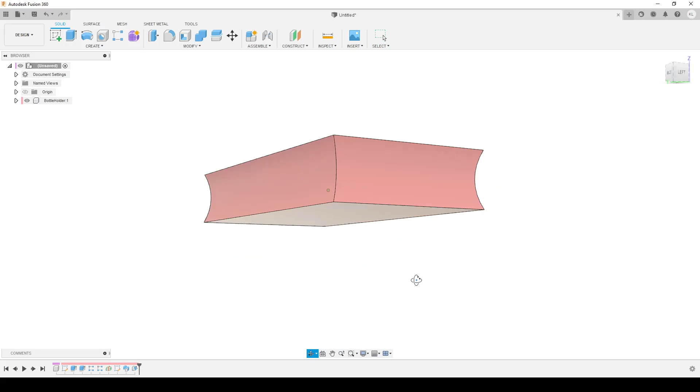I'm going to talk about how I designed it. This is a holder for pipette bottles for pigments for Jesmonite, because they come in really large bottles which are really hard to get the correct amount of pigment into the Jesmonite, which is a casting material.

So I needed a small holder like this. I have some design intents: an outer limit of a box and an oversize of the bottles. That's basically it, and I wanted like 7 bottles. I needed some way to get a grip of the box, so I did this little indent here.

I'm going to have a look at this because I see a lot of people get stuck in their design intent. They start designing without having some basic parameters - are you limited in size somehow and stuff like that - so you don't get too far into the design before you get into trouble. This is going to be quite basic for you who want to see my stupid advanced workflows. We can skip this one or just tag along and comment on how I do things wrong.

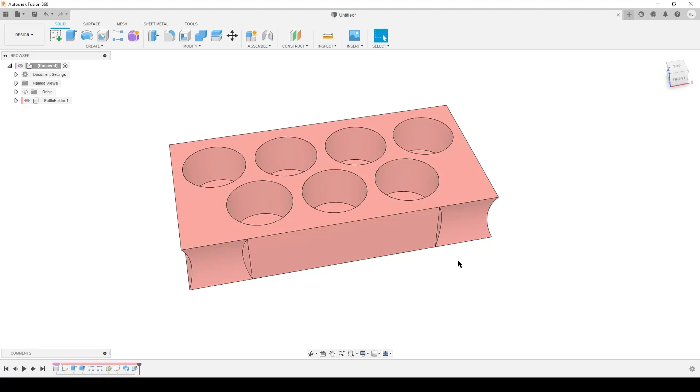So let's have a look at this. We're going to do new design. I will not save it, but you should always start by saving. Let's call it holder. So we start the component as always, and we're going to start with a sketch.

We can start it from the top. We're going to start with a rectangle, because one of the things I knew, an oversize that I'm limited to due to my 3D printer and some other space, so it needs to be 155 times 80. These I can't change that much because there are limitations in the physical world, so this is what I need.

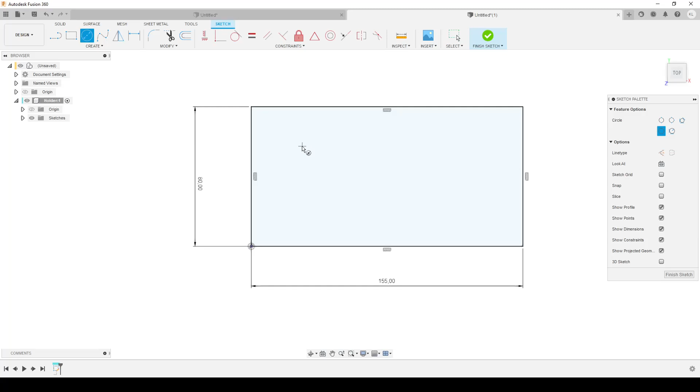The limitation I have, of course, is the bottle. The holes need to be 32.5, that's for the bottle, and enough space to get the bottle in and out. We're going to do 2 rows, so I'm going to do 2 circles. I'm going to tell Fusion that these circles want to be equal. So now I have my circles.

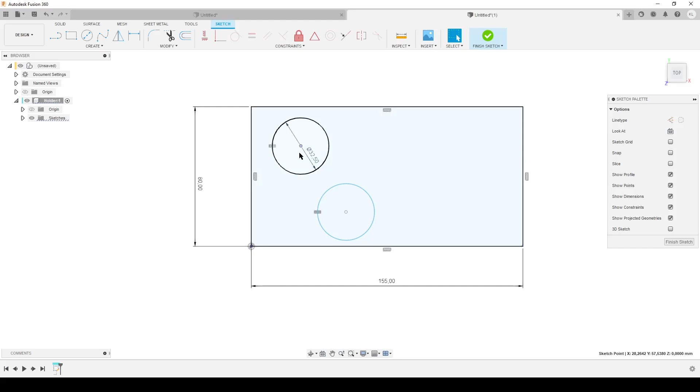I'm going to of course use rectangular patterns to spread this out later, but how do I want to place this? Let's have a look at the picture again. If we're going to put bottles in one even number and an odd number, we're going to make a triangle shape, or equilateral triangle shape, in the bottle.

So let's do that. Draw line and construction lines from here to here and up to our imaginary bottle, which is not there, and back to here. And of course we tell Fusion that all these 3 lines should be equal. Now we get to somewhere.

Oops, sorry, shouldn't move it like that. The thing I want to do now, we can pull it out like that. Yes, we can move it like that. I want to now start constraining these bottles inside this box here.

So top and down, I want the middle. This line here, even if it is slightly tilted, is a representation of a center between this. So let's do another line.

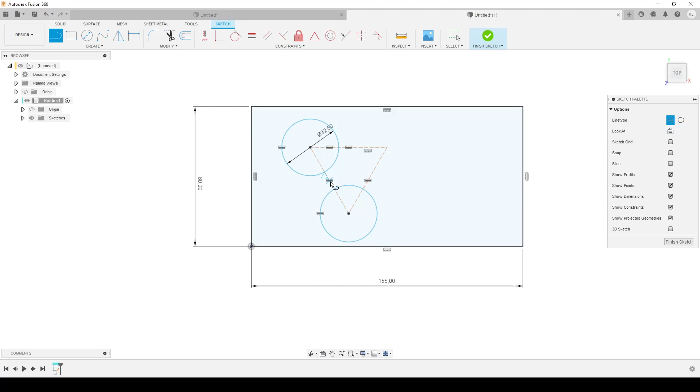You can of course just straightly do horizontal constraints, but sometimes I like to add lines so I know what I'm doing. Construction line from midpoint of this line to midpoint here. Tell Fusion I want these to be horizontal and vertical, like that. So now we've done it in one direction.

We can still move it up and down, but now we need to lock them in this direction so you get symmetric. And if you watch, let's look at my design intent: 4 bottles. If I have 4 bottles, I have 3 spaces between - 1, 2, 3.

So let's do that. Line. I'm going to do 1 line. I'm going to do 1 more. So this point out here is where the last bottle in this row should be.

And of course, these 3 lines here, marking up like this, should be equal. And they are an odd number of lines. That means that the center of this line should be centered to the top of the rectangle here.

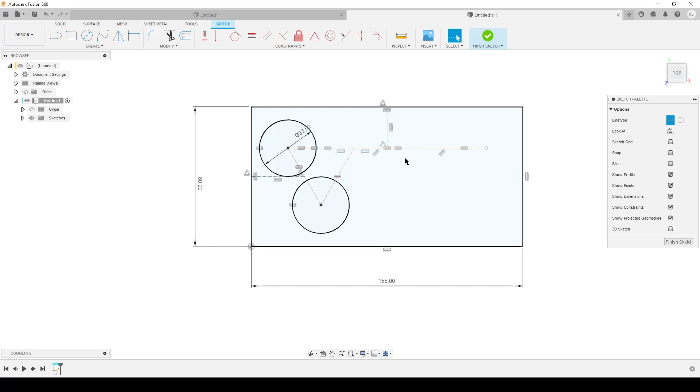So let's do that. There are other ways to do this, it's just giving me some options. So do like that. By doing this now, I have basically locked everything down except where I want the bottle. Of course, they cannot overlap.

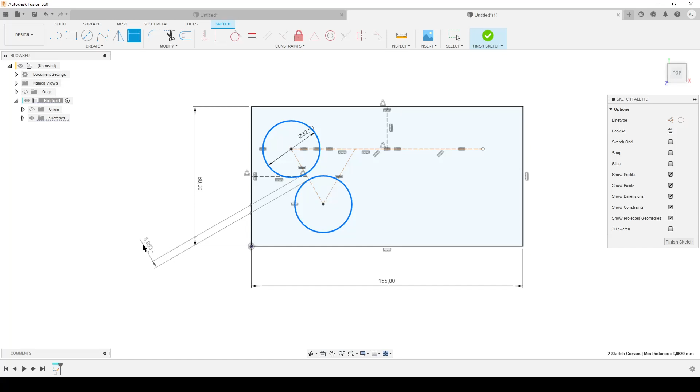So the thing that's of course in my design intent is that I want some spacing in between here, so let's add that. You hit D for dimension, right click and select Circle/Arc Tangent and select these 2. I want the spacing between the bottles to be 5 millimeters. By doing that, open up the sketches - we now have a fully defined sketch.

I have not defined the dimension to the side anywhere because they are locked into the middle rectangle with these 2 constrained lines. It's not the same distance everywhere, but I really don't care about that. So this gives me a very nicely locked down sketch.

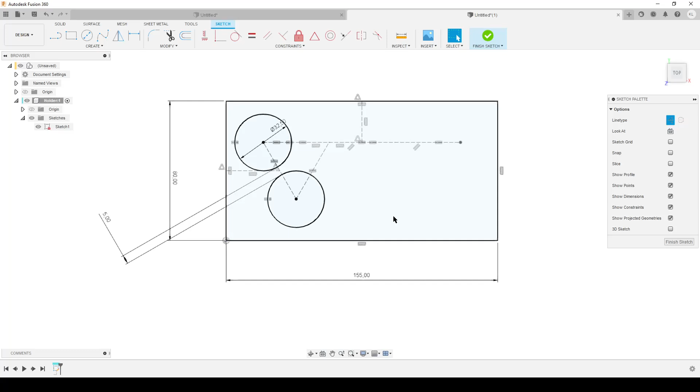I should say this is parametric workflow, but you can go back and change parameters. I will now use some measure, which means you have to redo the measure if you change dimensions. But my intention was these two dimensions are locked when the size of bottles are locked, and I also basically locked down this.

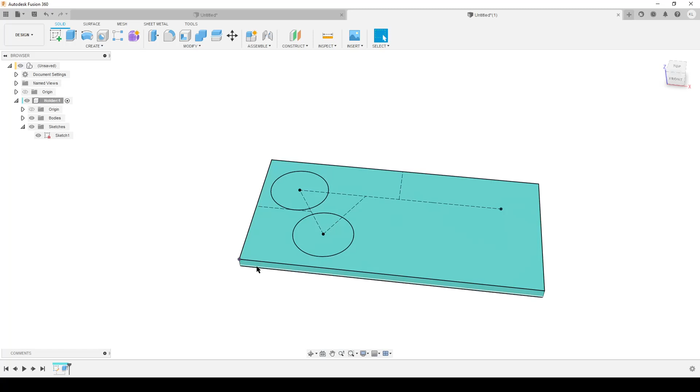So now I have something to start doing my 3D body. E for extrude. I'm going to extrude everything minus 5mm, a quite thick bottom. And I'm going to extrude this upwards 23mm. Now I have the basic shape I want.

Now I need to spread out these. S on the keyboard, rectangular pattern. We're going to use faces, this face. Now in direction, I can select any one of these short lines here. I can select the edge out here, but I can select this line instead. I'll explain shortly why. Check that the distance type is spacing.

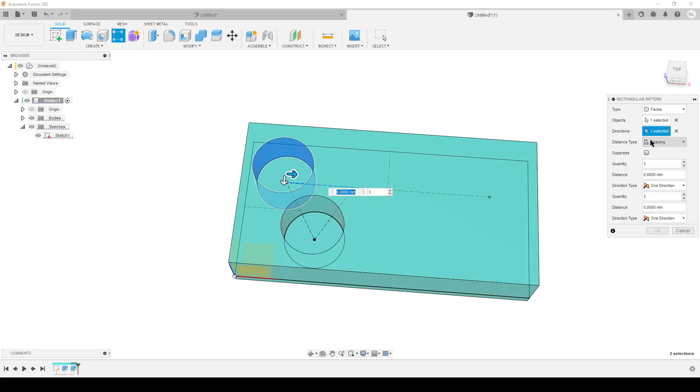Quantity we can change for later. The distance, I can do the math onto distance here, but I have a line mark, so just hit the 3 dots and do a measure. Hit 3, we wanted 4, like that.

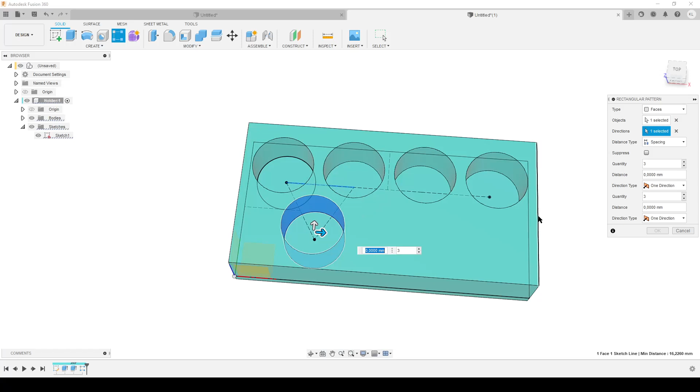We do a second rectangular pattern of this face. Once again, select one of these lines, do a measure, and in this case we wanted 3, so that's correct, and hit OK. By doing that, we have very rapidly designed the basic shape we wanted.

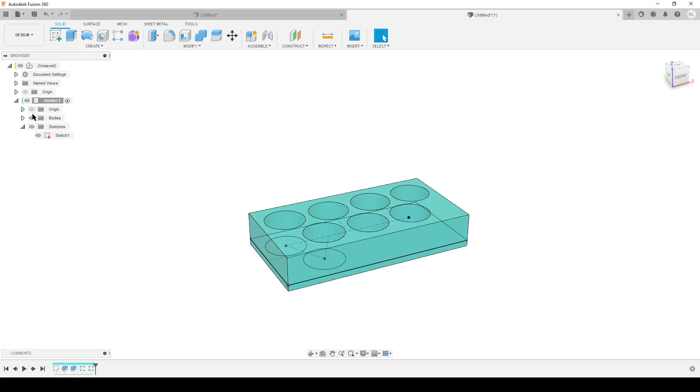And the last thing I want to do here is make this grip. I will not do the text, that's basically just a small extrude. But I want to make a small grip, and the problem is my origin point is at the corner down here, and I want the front to be centered, the flat part to be on the center.

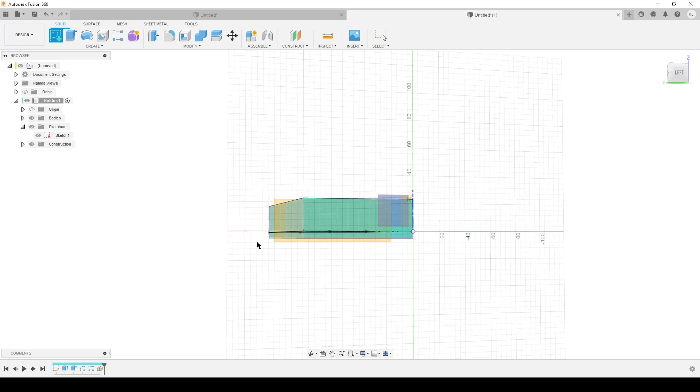I'm going to create a mid plane to work on between this face and that face. Create a sketch on the newly created plane, if we can pick it, like that. We do a projection of the edge here, so we have something to sketch with. We're going to turn off our first sketch.

S, we're going to do an arc. S for search, if I type arc, we do a 3-point, that's the easiest one here. 1, 2, and there. Where did we go? We had to hide the body, yeah, like that. Sometimes the colors get a bit bad.

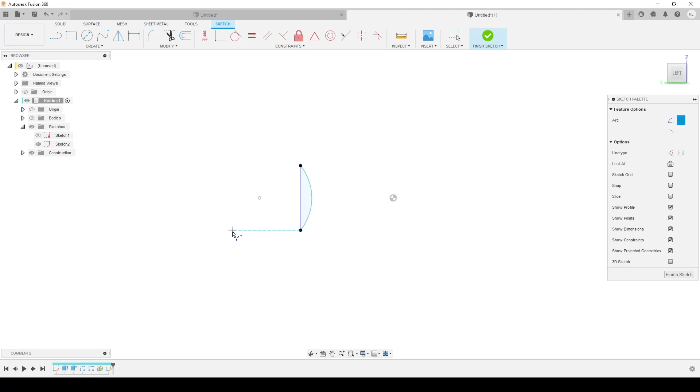Of course I want to dimension this. D for dimension. Once again, right click, select circle arc tangent, because I want to dimension the depth this cuts in, and I want that to be 4mm. Finish sketch, turn on our body so we can see things.

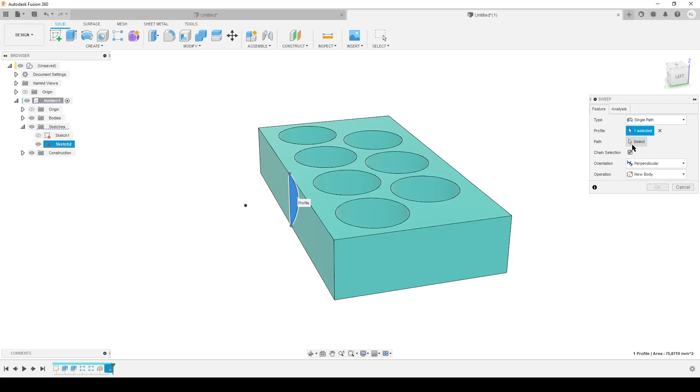So now I want to cut this around, so the best tool for that is a sweep. I'm going to do a sweep, select our profile. Of course now it's going to pick up the face, we hold down the mouse button until we can select profile. The path is going to be up here all the way around.

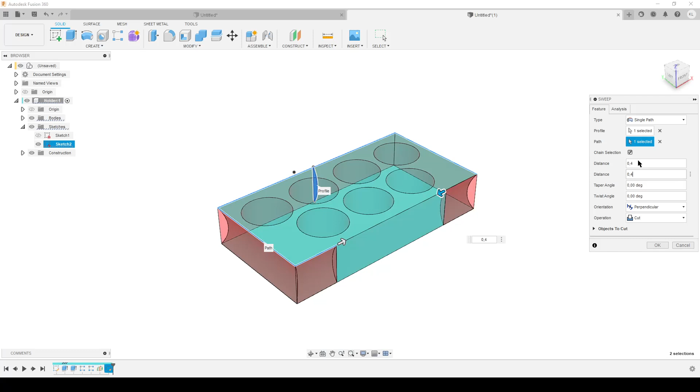But of course it cuts too much now, and both distances here are set to 1. So we can start by changing this to 0.5, 0.5. You can see the cut is now here in the middle. We want them slightly more apart, so let's do the distance 0.4, 0.4. As long as I put the same numbers in, you can use a parameter. I get the sweep to stop where I want to, something like that should be nice.

I can put some text here. The last thing I want to do is draft these little edges here slightly outwards. We're going to do a draft, select pull direction as the flat face, and the faces you want to move is this one.

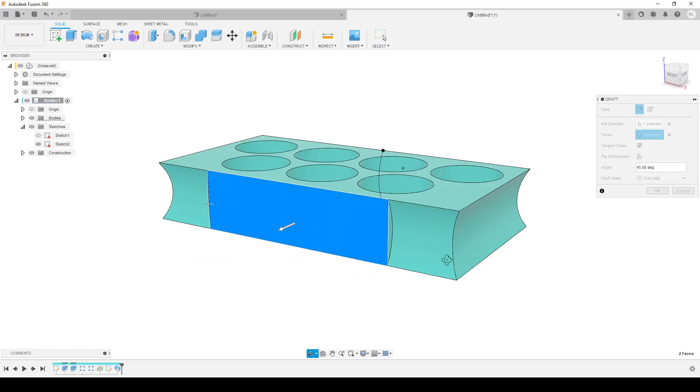Hold down control to select. If you can't select the face, just hold down control and find the face. Angle 45 degrees, yes that's good. And by doing that, I'm going to turn off that sketch. We have created this basic shape.

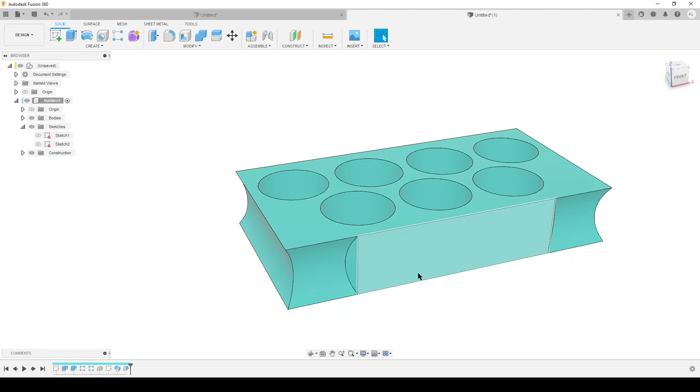Very simple. Of course, now you can add some fillets to avoid these sharp edges when printing, or chamfers. If you do a very small fillet or small chamfer, you get the same result in the real world with 3D printing. I think I'll add a small chamfer on the bottom, and the text of course, but I will leave that to you. That is a more simple thing.

So this is how I use a design intent and get a product out that looks like this after 3D printing to put the buttons in.